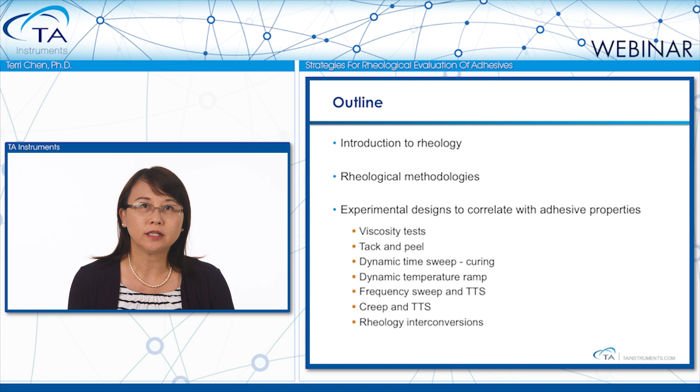First of all, what is rheology? Rheology is the science of flow and deformation of matter. Rheology studies the relationship between a stress and a deformation. When you apply a stress to a purely solid, elastic material, such as a spring, you will find out that the stress you applied is linearly proportional to its deformation, which is the strain. The ratio of stress over strain is defined as the modulus of the material.

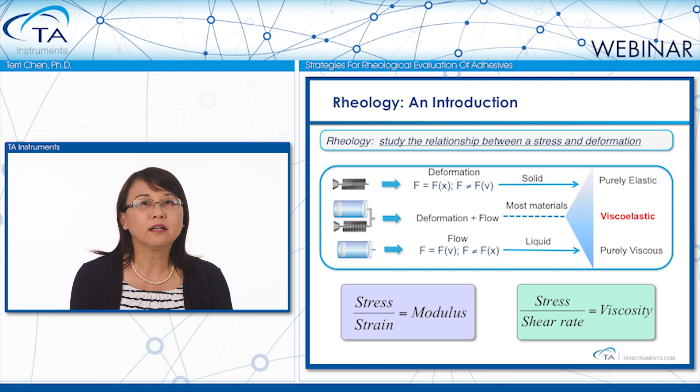When you apply a stress to a purely liquid, viscous material, such as water in a dashpot, you will see that the stress is linearly proportional to the rate of the deformation, which we call shear rate. The ratio of stress over shear rate is defined as the viscosity of this material. Most of the materials we work on our daily basis, such as adhesives, have both elastic and viscous properties. Therefore, these kinds of materials are viscoelastic.

Rheology analysis plays a big role in the adhesive industries. The rheological analysis results can be used to directly guide synthesis and formulation, help to troubleshoot processing problems, and also provide quantitative evaluations of the final product performance. First of all, rheology test results can be used to quantify molecular weight and molecular weight distribution of the base polymer in adhesives, compare differences in polymer structures such as branching or cross-linking. It also helps to compare differences between formulations.

Second, rheology tests can also help to guide processing conditions. For example, in the adhesive coating process, rheology measures shear viscosity of adhesive solutions or hot melts. It helps to guide the application's rolling speed. In adhesive curing, rheology test results can help to optimize the curing conditions, such as temperature, humidity, or UV intensity. In addition, rheology can also quantitatively measure the end product performance. The measured rheological parameters can be used to directly correlate with adhesive, cohesive strengths, and also elasticity.

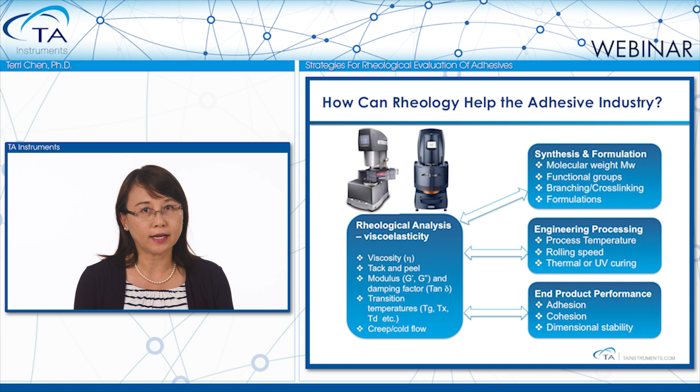This table lists 4 commonly used rheological tests in adhesive analysis. First, a steady flow test can measure shear viscosity over a wide range of shear rates. The axial testing on a rheometer is typically used to measure tack and peel. The dynamic oscillatory tests are the most popularly used tests in adhesive analysis. First, this measurement measures the transition temperatures, such as glass transition. Also, the measured parameters, such as G', G double prime, or tan delta, are directly used to correlate with the adhesive performance. A creep experiment can also be applied to directly measure the shear resistance, how good an adhesive is to resist a cold flow over time.

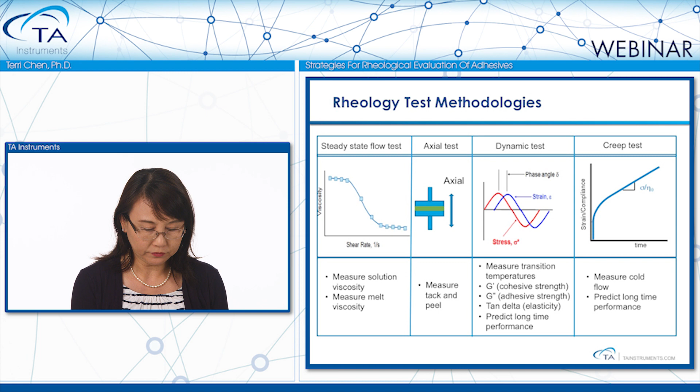For people working with adhesive coating processes, steady shear flow viscosity measurement can be helpful to guide processing conditions. For example, pressure-sensitive adhesives are traditionally processed in two major methods: solvent coating or hot melt coating.

This figure shows a correlation of sample viscosity measured at different shear rates versus their properties and applications. The viscosity measured at low shear can help compare and predict stability, how stable a formulation can be against sagging or sedimentation.

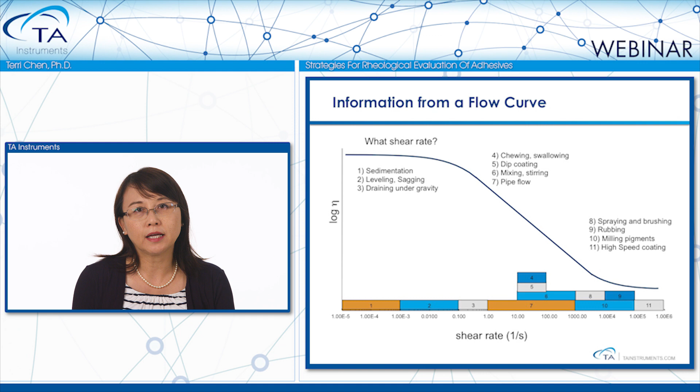Viscosity measured at medium shear correlates to liquid sample mixing and transportation, such as pumping or pipe flow. The high shear viscosity measurement directly correlates to the coating application conditions.

Here is an example of two water-based adhesive formulations. Formulation A is more shear thinning, and formulation B is more Newtonian. Under low shear rate, formulation A shows much higher viscosity than B, which indicates that A potentially should have better storage stability against phase separation and sedimentation.

Both formulations have similar viscosity at medium shear. But since A is more shear thinning, at the application high shear rate, formulation A shows much lower viscosity compared to formulation B. This means A potentially could spread easily and coat thinner layers.

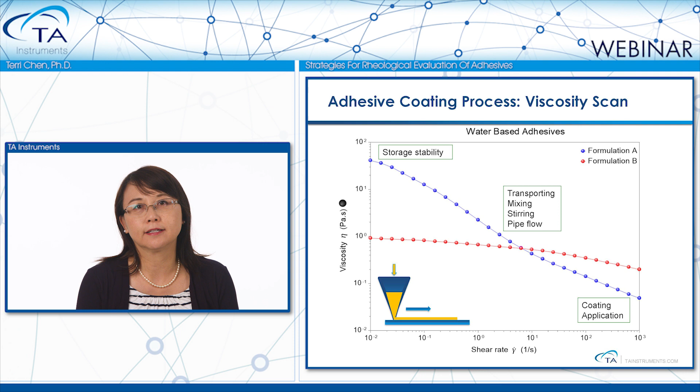One of the most commonly used methods for evaluating the tack performance of a pressure-sensitive adhesive is described in ASTM D2979. This test can be conducted on a rotational rheometer using an 8 mm parallel plate geometry.

We place the sample between two parallel plates, apply a certain pressure for a short time, and then pull off the plate with a speed of a certain millimeter per second, such as 0.1 millimeter per second. The maximum force required to pull the plate away is defined as the sample tackiness.

In this type of test, breaking may occur in three different ways. If the bond force at the interface is stronger than the cohesion strength of the adhesive, breakage will occur between adhesive layers. If the cohesion strength is much stronger than the adhesion bond at the interface, breakage will occur at the plate interface. Sometimes there will be a mixed breakage of both cohesion and adhesion.

This figure shows the tack testing results of a non-cross-linked and a cross-linked PSA sample. The cross-linked PSA shows significantly higher cohesion strength due to the introduction of a cross-linking network. Therefore, failure occurred at the interface.

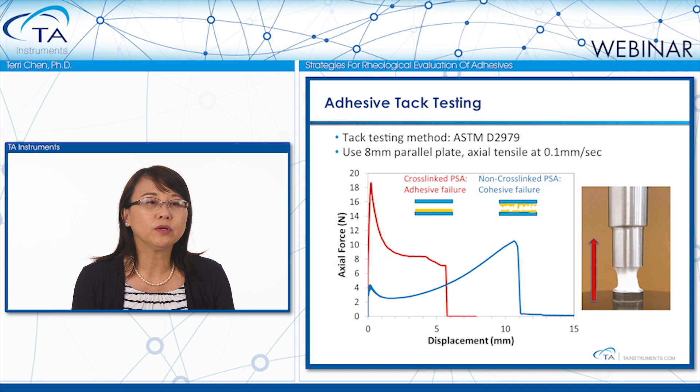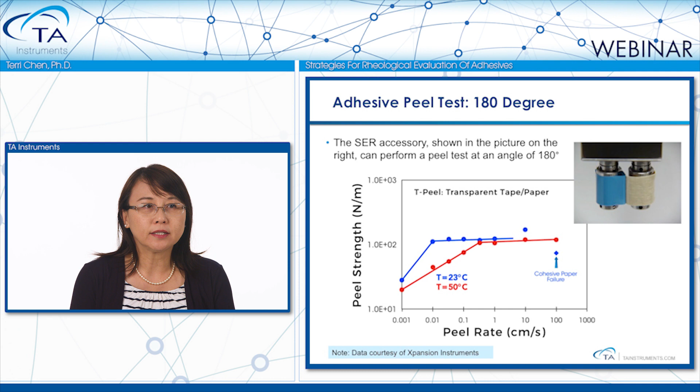Peel tests are usually conducted at different peel angles, such as 90 degrees or 180 degrees. Using an SER geometry on a rotational rheometer, we can easily perform the peel test at 180 degrees. The peel strength can be measured at different peel rates and also with different temperatures.

Dynamic oscillatory tests are the most commonly used rheological test in adhesive evaluations. In an oscillatory test, a sinusoidal stress is applied to the sample at a certain frequency. The sample response in deformation is monitored and recorded.

If the input stress is within the linear viscoelastic region of the material, then the output strain should also be in a sinusoidal waveform. The shift between the input stress and the output strain is the phase angle, which is used to describe the viscoelasticity property of the material.

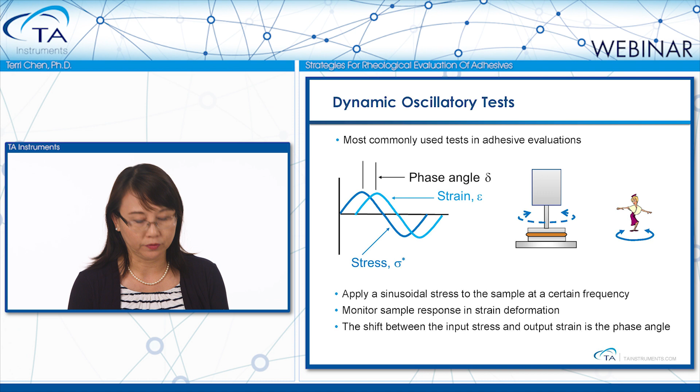G star is the complex modulus. It is calculated from the ratio of complex stress over strain. G star can be separated into two components, which are G prime and G double prime.

G prime is the storage modulus. People also call that the elastic modulus. It measures the elastic response of a material, the ability of the material to store energy.

G double prime is the loss modulus. People also call that the viscous modulus. It measures the ability of the material to dissipate energy, how much energy is lost as heat in an oscillation.

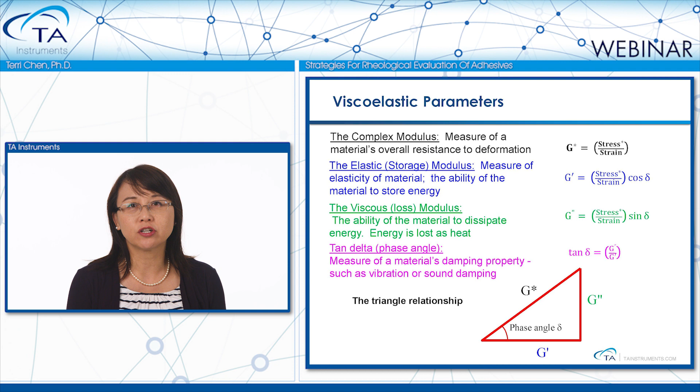In many adhesive books and papers, people have provided information on how to correlate dynamic testing results to the performance of adhesives. For example, the storage modulus G prime correlates to the cohesive strength of the material, describing the bulk property of the adhesive. A higher G prime at high frequency, which correlates to high shear, indicates high peel strength.

A high G prime at low frequency, which correlates to a long time, indicates a good cohesive shear resistance. The loss modulus, G double prime, describes the viscous response of the material, so it correlates to the adhesive property at the interface. A high G double prime at high frequency correlates to high adhesive peel strength at the interface, while a high G double prime at low frequency correlates to a high adhesive shear resistance.

Tangent delta is the ratio of G double prime over G prime. It measures the elasticity of a material. Low tan delta means the sample has good elasticity and high cohesive strength. A high tan delta means the sample is more damping and potentially has high adhesive strength.

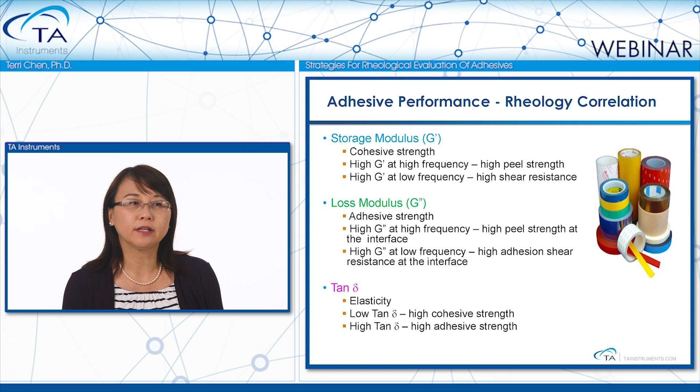So how many different types of oscillatory experiment can we run, and what kind of information can we obtain out of each test? Here we have listed some typical dynamic test methods and their applications. First, a strain sweep or stress sweep experiment helps to measure the material's linear viscoelastic region. It helps us determine what strain to use for all other dynamic testing.

A dynamic time sweep is commonly used to monitor curing. The curing can be monitored under a controlled temperature, humidity, or under a certain UV intensity.

Dynamic frequency sweep provides direct correlation to a sample's tack, peel, and shear resistance information as a function of frequency or time. A frequency sweep experiment running on a polymer melt sample can also provide information on the polymer's molecular weight and molecular weight distribution.

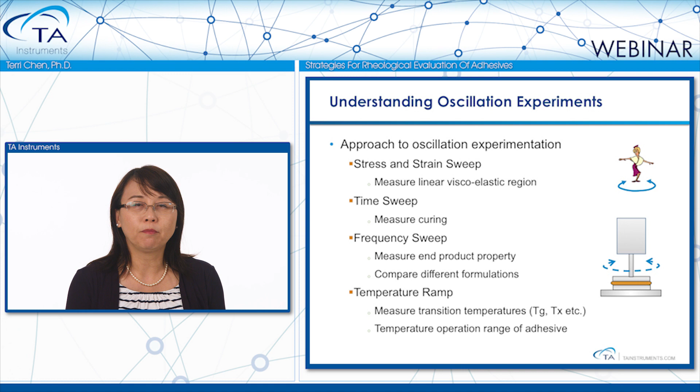The dynamic temperature ramp experiment is probably the most popular test in adhesive evaluations. It measures transition temperatures and also provides information on the adhesive's operating temperature range.

Many adhesives are cured or partially cured through heat, UV radiation, or under humidity. A dynamic time sweep experiment is typically used to monitor curing.

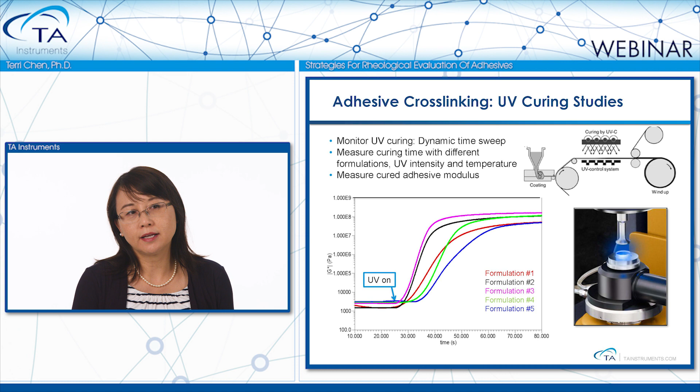This type of rheological test allows us to quantitatively measure adhesive curing with different formulations, different controlled UV intensity, and also at different temperatures.

In most cases, when material cures, it shrinks in dimension. Adhesive curing shrinkage will cause product failure during the process. Using a rheometer with a UV curing accessory, we can quantitatively monitor this shrinking phenomenon.

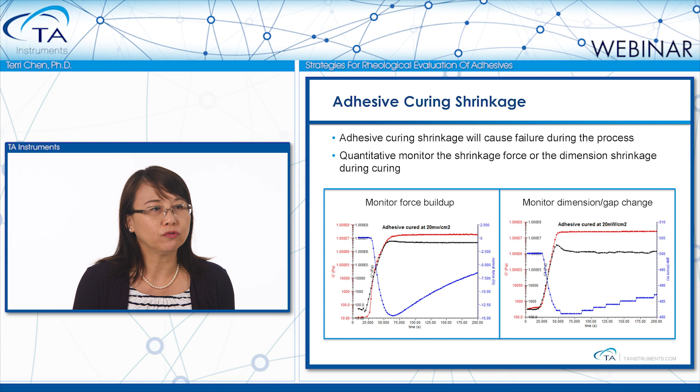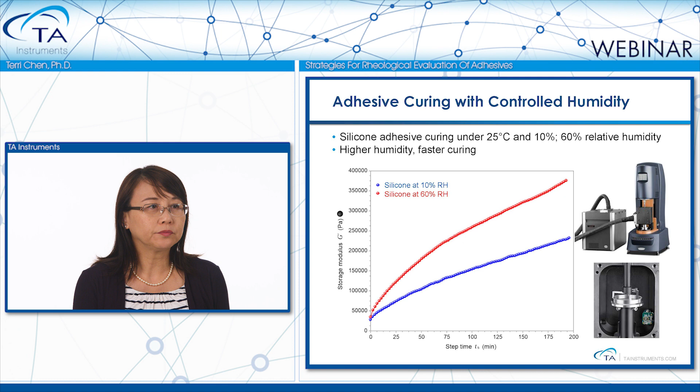Above Tg, the sample softens and the modulus drops significantly. The sample behaves in a viscoelastic manner. At even higher temperatures, a non-cross-linked PSA will molten.

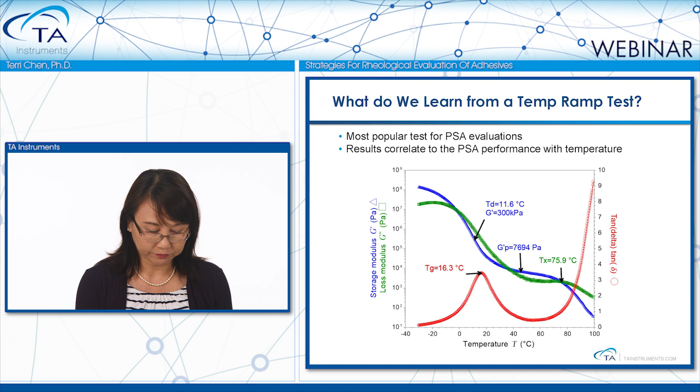The dynamic temperature ramp experiment on adhesive-based polymers can also be used to compare polymer molecular architectures, such as molecular weight distribution and cross-linking. For example, when testing the same type of adhesive polymers with different molecular weight, one will observe that if the polymer has lower molecular weight, it will show a shorter rubbery plateau region in a temperature ramp experiment.

If after glass transition the polymer shows a continuous decrease in G' or G'' instead of having a relatively flat rubbery plateau region, then it indicates that this polymer may have a broader molecular weight distribution.

If the polymer is cross-linked, first it will show a higher Tg compared to the same polymer that is not cross-linked. Also, the rubbery plateau modulus of a cross-linked polymer will be higher. The shape of the curve will be more flat and extend to much higher temperatures. A cross-linked polymer will never molten.

In some literature, people use the rubbery plateau modulus value to quantitatively calculate the degree of cross-linking. Here is the summary of the polymer structural information we can obtain from a temperature ramp experiment.

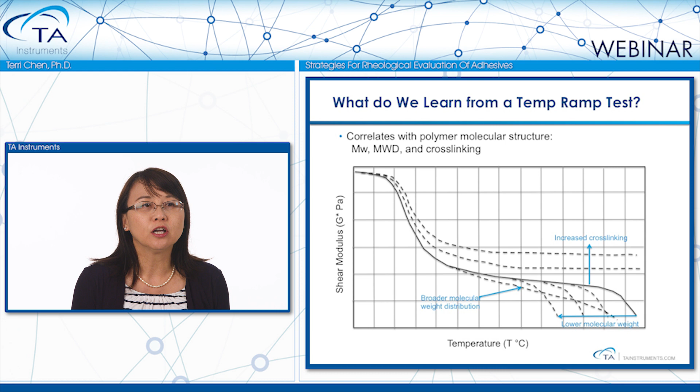Here, I would like to introduce some guidance for a good temperature ramp experimental design. First of all, it is always good to load the sample at higher temperatures because the sample will be soft or molten so that it will be easy to trim. The most commonly used geometry for testing a PSA sample is the 8mm parallel plate. If you do not intend to go through glass transition, a 25mm plate is also okay to use.

The measurement temperature usually goes from below the glass transition until the sample is molten or before it degrades. The commonly used heating rate is 2 to 5 degrees per minute, and the commonly used frequency is 1 Hz, or some people use 10 radians per second.

The most challenging parameter setup is the sample strain. Strain needs to be within the linear viscoelastic region of the sample. When the sample undergoes such a big change in physical property, it is important to have the capability of adjusting the strain during a temperature ramp experiment.

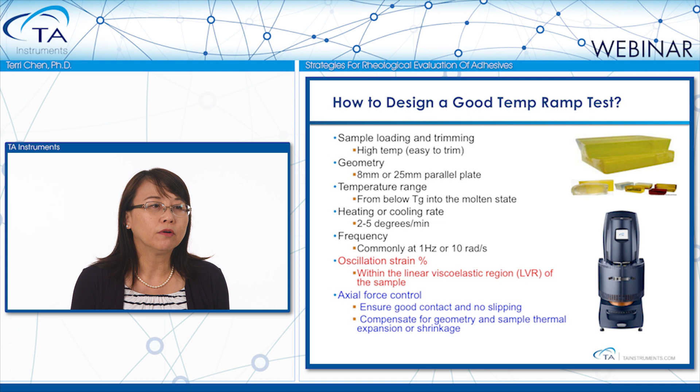In addition, both sample and geometry will expand or shrink as we change temperature. So it is important to have active axial force control to avoid sample slipping and also to compensate for sample and geometry expansion and shrinkage.

As we have just mentioned, setting up a good strain is the key for getting good temperature ramp experimental results. So how do we decide what strain to use for a certain sample testing?

This figure shows a series of strain sweep tests at different temperatures from below glass transition until above glass transition. First, let's look at the red curves, which is the strain sweep at minus 30 degrees C. As we can see, below glass transition, sample modulus is high, and at a strain of 1%, this measurement maxes out the instrument torque. It means we are not able to go to a strain higher than 1 to 2%.

Also, below glass transition, the sample is fragile. Using a large strain may crack the sample. Therefore, at low measurement temperature, using a smaller strain is preferred.

Let's look at the black curve on the bottom of this figure. This is the strain sweep experiment at 50 degrees C, which is above the glass transition. At this temperature, the sample is really soft and has low modulus. A 1% strain will get a torque of less than 10 micronewton-meter.

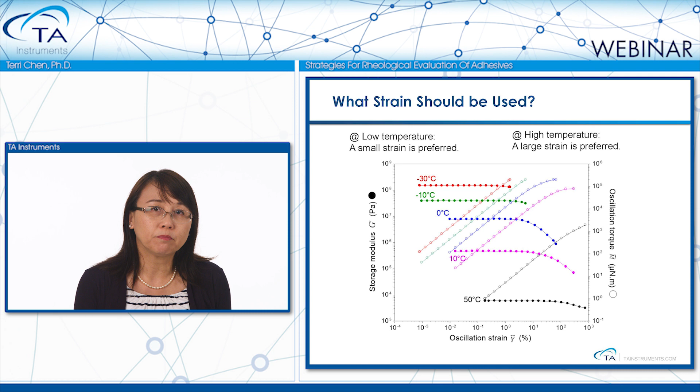Different rheometers and different softwares use different methods to alter the measurement strain in the middle of a test. If you're using one of TA Instruments rheometers, such as a DHR or ARES G2 rheometer, there are two ways for adjusting the strain. One method is called auto strain. This method is good for both DHR and ARES users.

As you can see from the screenshot on the left side, this method asks the operator to set up a torque window during a test. This torque window is not the instrument spec. It is particularly selected based on the fact that the measurement is within the linear viscoelastic region of the sample and also ensures a good signal-to-noise ratio. When the test strain requires torque that is outside of this window, strain will be adjusted.

The other method is for the DHR user, shown on the right side of the slides. In the main temperature ramp experimental procedure, the operator enters a small strain that is in the linear viscoelastic region for the entire test. Then, under the Controlled Strain Advanced tab, selecting non-iterative sampling, the software requires the operator to enter a lower torque limit. This lower torque limit is not the instrument low torque spec, but it is a smart way to help adjust the strain when the sample becomes really soft.

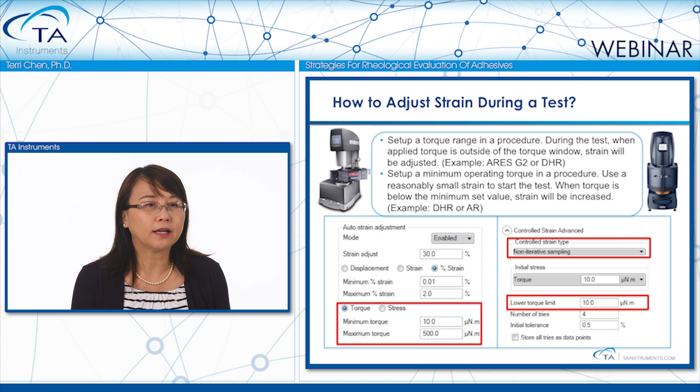From this particular point up to higher temperatures, the measurement torque was fixed at 2 micronewton-meter. So strain, in this case, will continuously increase as the sample gets softer, but this strain will still be within the linear viscoelastic region. This method allows automatic strain adjustment and gives very good measurement results for all temperature ramp experiments for adhesives.

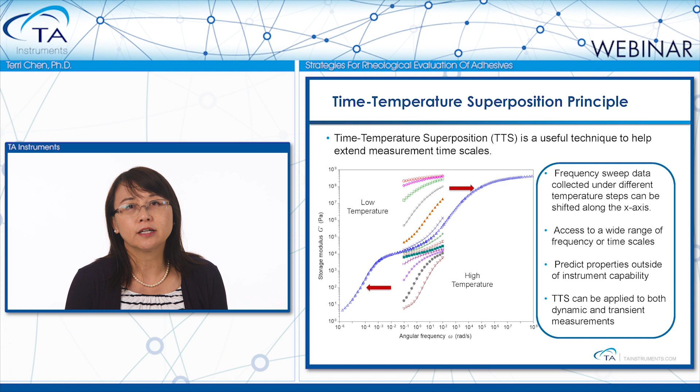In addition to dynamic testing, time-temperature superposition can also be applied to transient tests, such as stress relaxation or creep.

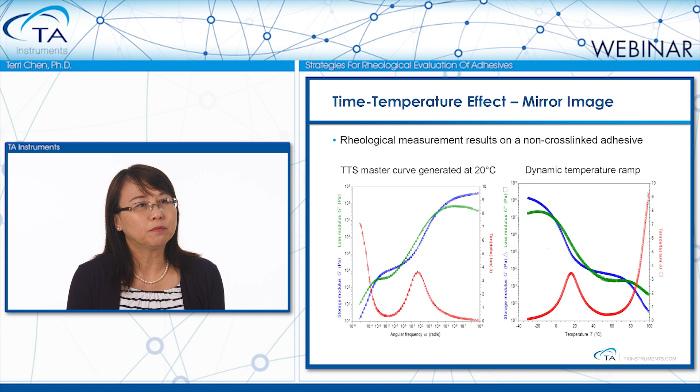The figure on the left side of this slide is an example of TTS data on a non-cross-linked PSA sample. The reference temperature was selected at 20 degrees C. If you put this TTS master curve side by side with the dynamic temperature ramp data, you will easily see that these two results look like a mirror image. This is the principle of time-temperature effect.

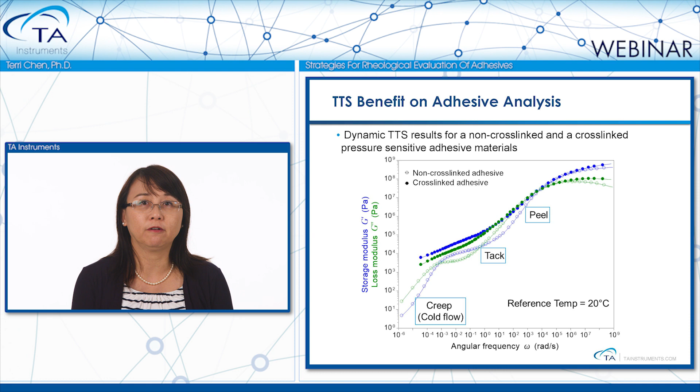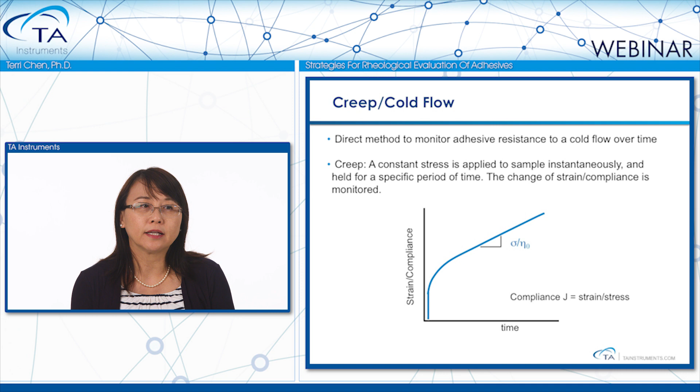Alternatively, shear resistance property can also be evaluated using a transient experiment, which is a creep test. Actually, creep is a more intuitive method to monitor cold flow of an adhesive. In a creep test, a constant stress is applied to the sample instantaneously and held for a certain period of time. During this time, the change of strain is monitored. Sample compliance is calculated from the ratio of strain over stress.

In order to predict shear resistant property of an adhesive over a long time, such as months or years long, a creep TTS experiment can be performed. It is a multiple-step creep experiment conducted at elevated temperatures starting from your reference temperature. The high-temperature creep results can be shifted and also used to predict long-term performance.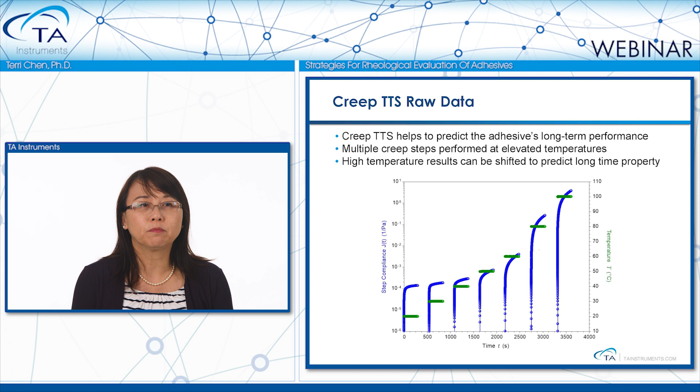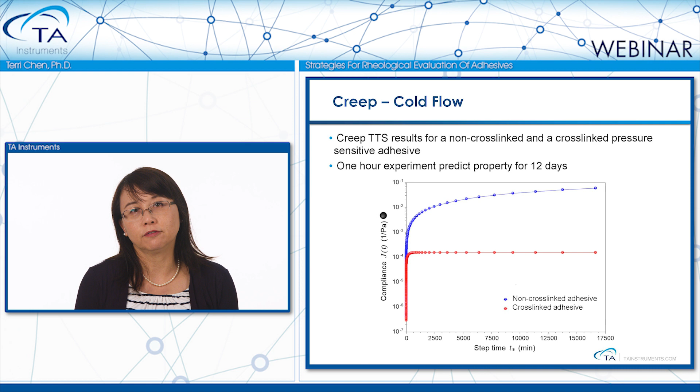In the last section of our today's talk, I would like to introduce the concept of using rheology interconversion. Any material in the world only has one set of linear viscoelastic properties. Within the linear viscoelastic region, the rheological properties of a material can be interconverted from dynamic to transient properties through relaxation and retardation spectrum calculations.

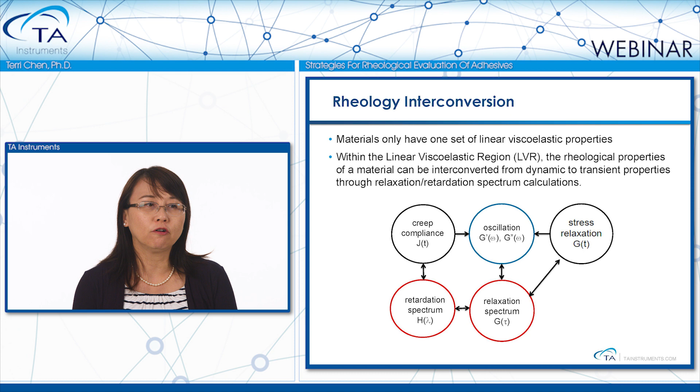So using this interconversion calculation, we can directly convert our dynamic TTS data into transient creep data. There is no need to perform two sets of separate TTS experiments. This interconversion technique helps us significantly save experimental time.

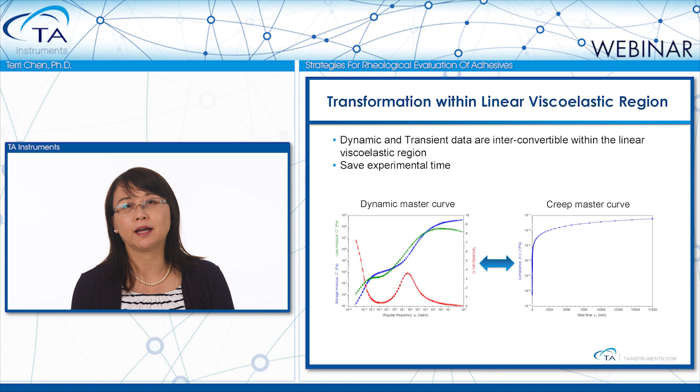Here, let us summarize our today's talk. Rheology is a powerful technique that is widely used in adhesive industries. The rheological analysis can provide useful information on adhesive polymers' structure-property relationship, guide adhesive processing, and also quantitatively evaluate the end product performance. Designing and selecting appropriate rheological test methods and parameters are important to ensure good measurement and accurate correlation to the adhesive properties.

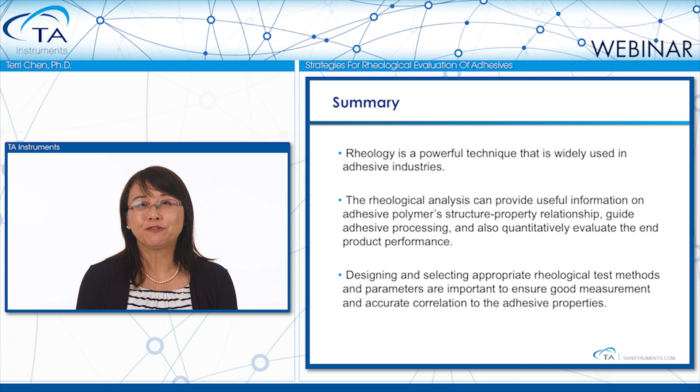With this, I would like to conclude our today's talk. Thank you very much for your attention, and I'll be very happy to take any questions.